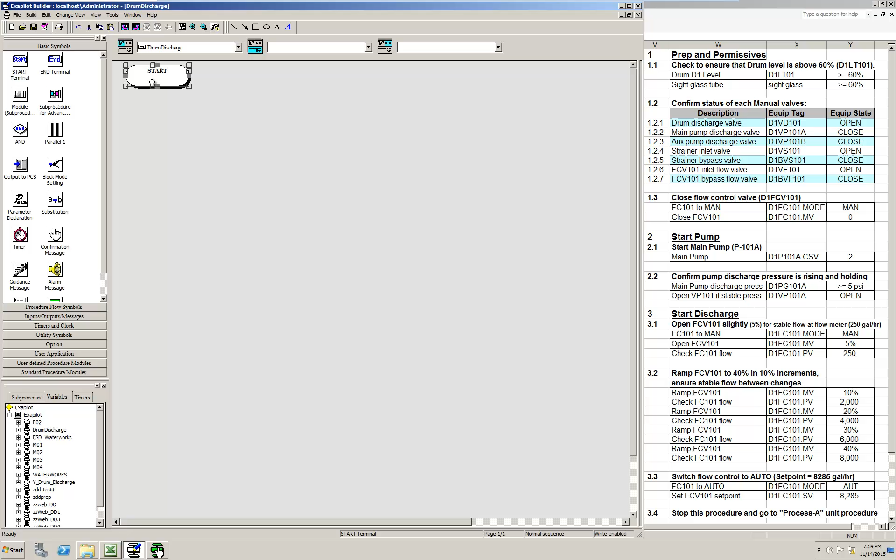First thing we'll do is go ahead and get a start terminal, because every procedure has a start and an end. So we'll go ahead and place a start and an end out on the procedure.

The next thing we'll do is go ahead and configure the OPC interface. You don't really have to do that right up front, but several of you who were in my webinar asked me how you'd be able to communicate over your control system.

So if your control system can communicate via OPC or convey information to an OPC server, then Exapilot can be used to work or act as a supervisory control over top of your controller, or even just provide guidance messages to the operator to take action.

So the first thing you'll do is go ahead and go to Build and select Main Procedure Property. As soon as you do that, the Basic tab is shown for this configuration, and at the bottom half of that pop-up window, you'll see the OPC server configuration.

It asks you for the OPC server name. When you click on the drop-down box, you'll see all the OPC servers that have been registered with that computer, that PC. And so you can see here I've got several third-party OPC servers, the TPN server, Experion PKS server, iFix, and some others. And I also have Yokogawa's OPC server called Exaopc.

So I'll select that one for this case. If your server is not listed in the list, it's okay. There's some procedure to go add and register your OPC server with your computer in the Exapilot system. And once it's registered, it'll show up in the drop-down box.

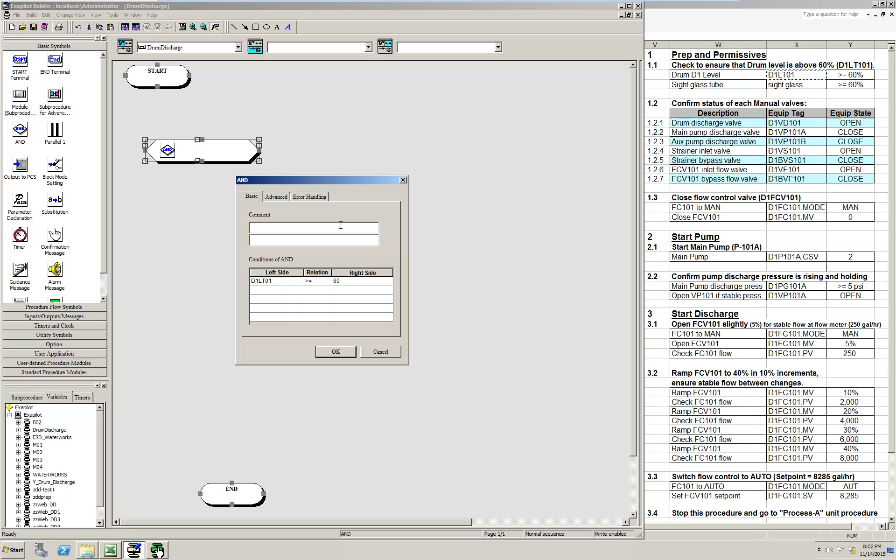So copy this, I'll paste it right into the block. And then I have this relational drop-down box, so I can choose less than, equal to, greater than, equal to, not equal to. In this case, I'm going to say greater than equal to, and then 60%. And then we'll put a comment on here and call this drum level check.

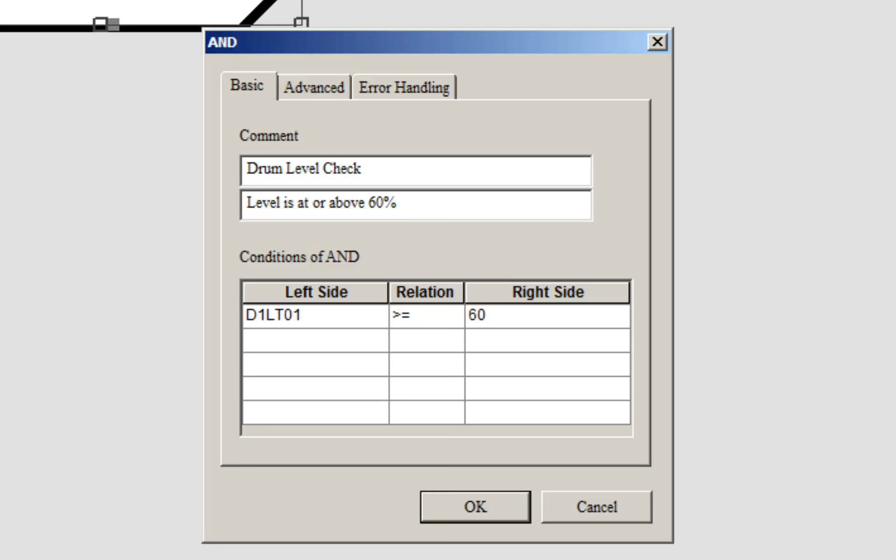Okay, and so we're done. I need to go ahead and expand this, or I can expand this if I had more text in here. You can see I can change the shape and size of this object, and that way I could add in more text here if I wanted to, saying that the level is at or above 60%. And then we can go ahead and say OK. I can resize this block to match the size for the text that's there.

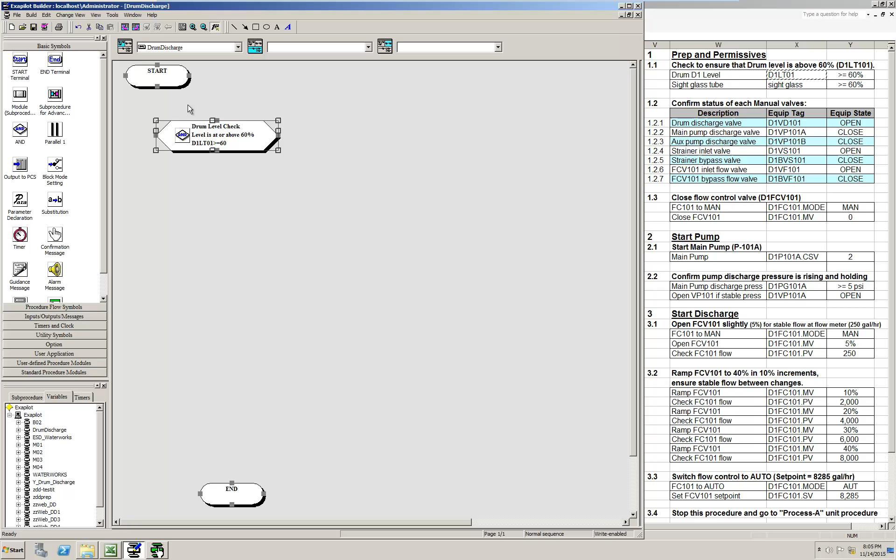And then I want to go ahead and wire that up to the start block so the logic flows properly. So I can bring this up here and say from the start, the logic flow is going to go down into this level check where it reads from the DCS.

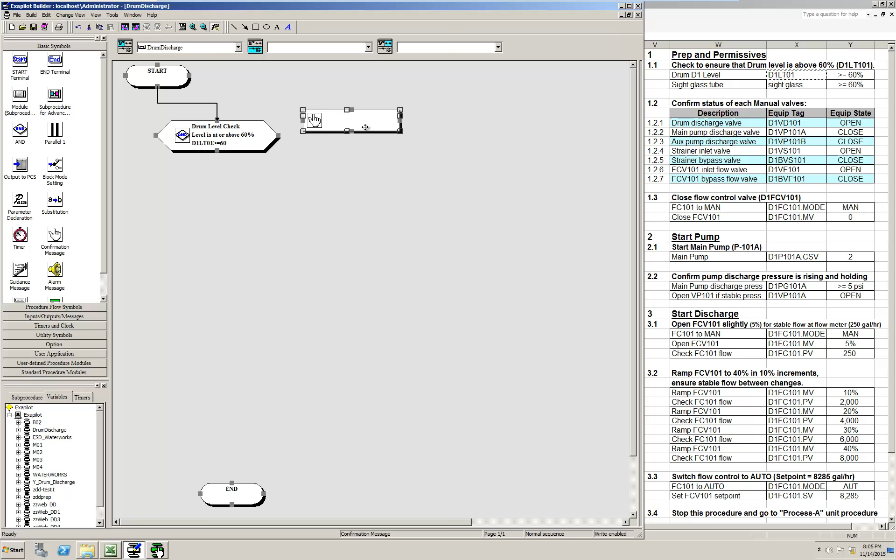The next thing we're going to do is go ahead and confirm the status of all 7 of these valves. So what I can do is build one, and I can copy and paste for the other ones. So how will I do that? We'll go ahead and use a confirmation message. So this is another object in the library that we can drag and drop into our project. And then I can just double click it to configure it.

And the comment is going to be a drum discharge valve. And then we want to go ahead and use the message. We can use the text right off of the standard operating procedure. So the action is for it to be open. So we'll copy that. We'll say, hey, we want this to be open.

And then the next convention I'm going to use is grab the tag name. So we want to say that open this tag, it's the equipment tag. Paste that in there. And then we'll go ahead and get the general description, drum discharge valve, right? So we'll copy that and put that into the Exapilot object. And we'll go ahead and change the color of the text.

I like to use blue for operator action messages. And then we'll go ahead and go under advanced. I can have an active sound or no sound. I'll leave this one active, but I'll make no sound for all the other ones. And for the display, I'll put a little display message in here that can then be used for display as part of prompting the operator.

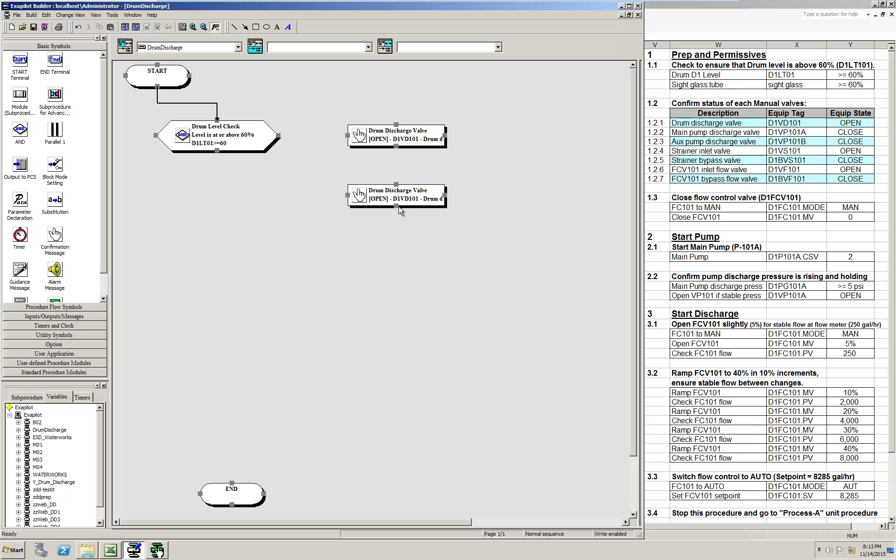And the next ones I can create just by simply copying and pasting this down. That way it'll allow me to keep the blue color. So I double click on here, you can see I still have the blue color text. And then, but I actually want to remove the sound, and I'm going to turn off this extra display text. Okay, so I'm going to use a little movie magic to realign some of these and get the rest of the valves in place.

So now that I've used the movie magic to build out the rest of these valve checks, we can go ahead and wire it up. I've already done that for the 7 valves. I've gone ahead and connected each of them with this little flow arrow, and I need to do that now for the level check. So coming out of the level check, we can simply left click on the node there and drag and drop that onto one of the nodes on the first drum discharge valve step, and then I need to characterize it just to say yes. So if it passes this criteria, then it'll go on to this step of check drum discharge valve, and it'll keep flowing on down and so on until it gets to this last check.

So once these things are all done by the operator, the next step is to go ahead and put the flow control loop in manual mode and write a 0 to the output to close that valve, ensure that flow control valve is closed. And then we'll start up the pump.

So what I'm going to do here is then grab a block mode setting object, drop that onto the project screen, and I'll drop on an output to PCS object onto the screen. This is to close the valve, and I need another output PCS to help me accomplish starting the pump. So let's go ahead and configure those.

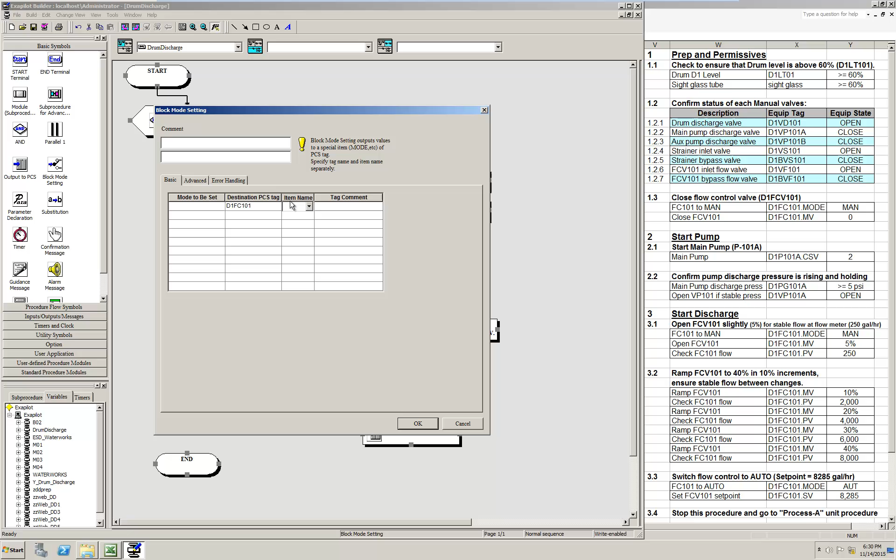So we'll take the valve, copy this tag name onto my Exapilot. So I can put this into my tag name segment, and then for the mode, for this mode block, it asks me for the parameter of the tag name separately from the tag name itself. So I need to use the drop-down box and select mode. And then for the setting, it allows me to choose the enumeration. So I can choose manual. And I'll go ahead and label this as main flow control valve. And this is the flow control valve.

Okay, and then I need to do the same thing. I need to set the flow control valve output to 0. So this is going to be the tag here, the MV, with the manipulated variable. It might be .op on your control system, depends on your control system. And the value is going to be 0.

I'll just go ahead and put, you don't have to put a range in, but I'm going to go ahead and put the range in. And this is the flow control output to the flow control valve.

And then the next thing we can do is start the pump. Once the flow control valve is closed, we can then go ahead and write to this pump. And it's getting a little different. I don't need the mode on the pump because the pump output is not a PID loop, it's a digital composite or a switch.

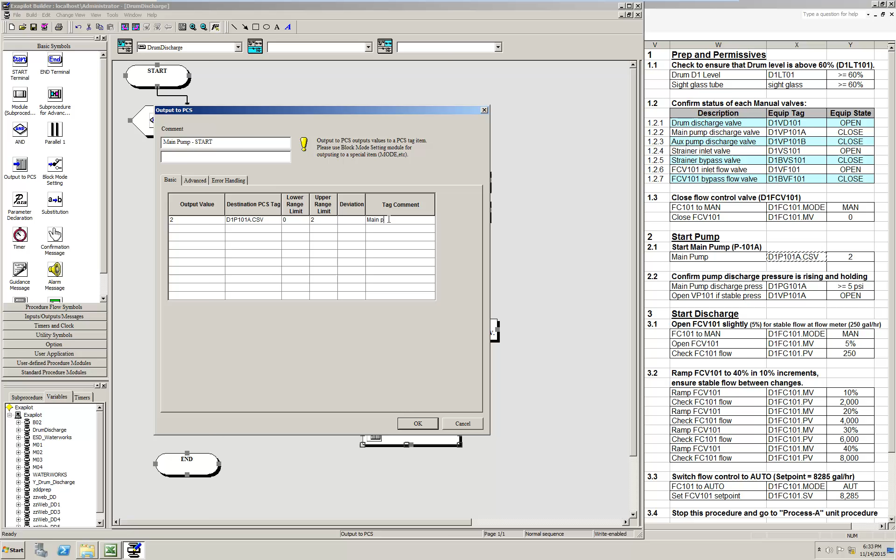And then I'm going to go ahead and skip the ramping procedure. Really, my main goal here is just to show you how easy it is to go ahead and perform reads and writes and make decisions within the procedure. That's mainly what I wanted to accomplish here.

All right, so now I've completed the line if it passes the level check, but what happens if it fails the level check? For that, we want to go ahead and create an alarm message. So for the alarm message, I'm just going to put 'failed transmitter level check.'

And to make it a little bit more fun for us on simulation, I'm going to give the ability to recover from this. So if you have a failed check here, I'm then going to go ahead and have a confirmation message to allow the operator to try to recover from this failed check. And that's because this is not connected to a real system, and I don't have an OPC server simulator running.

It's going to fail this check every time, it's going to read a 0. So I want to be able to recover from that so I can show you how this procedure works. And so I'm going to go ahead and say perform sight gauge check, so we can have the operator go out and look at the sight gauge and manually check the level and enter a value.

All right, and since this is an operator action, I'm going to go ahead and make this blue. And I'm going to show you a feature of the confirmation message that I talked about earlier but didn't demonstrate. So you have 3 choices on a confirmation message: confirmation only, selection, and setting. Under selection, this is what you'd use to then configure a set of selection buttons for the operator to select. In this case, I'm not going to do that.

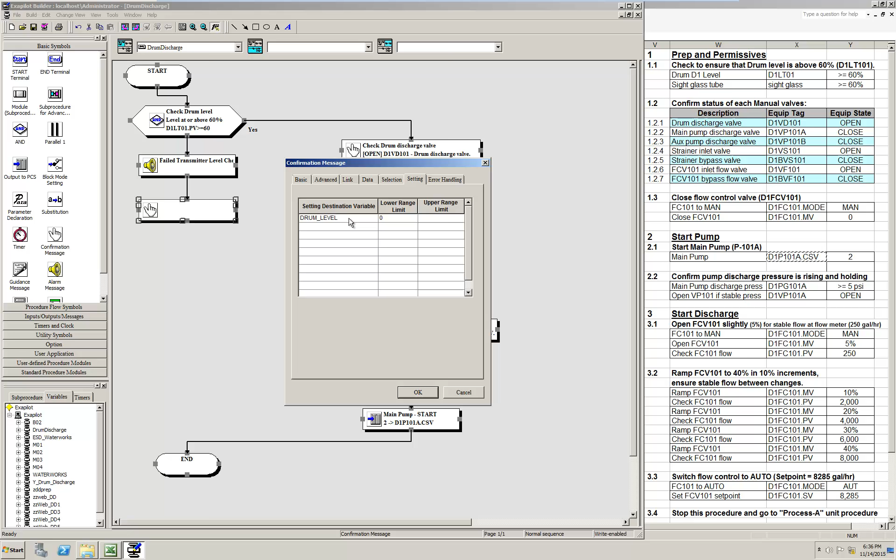Say OK. And then I can drag and drop on a parameter declaration down here. I can actually place it anywhere on the page. I'm going to put it down here below the end block. If I double click on that, then I get a pop-up here, and I can now enter in the variable that I want to write to.

So this variable here is going to take the input that the operator is going to enter and store it, because then I'm going to use that variable as another check, just like we did on the drum level check from the transmitter. We're going to do another check off the operator input to see if it passes the same criteria. Just because the operator entered it doesn't mean it's an automatic pass, right?

It's got to pass this criteria here. And instead of looking at the DCS tag.parameter that's coming from the OPC server, I'm now going to use the variable that the operator entered to do that check.

And then if it passes this, then I want to then go back into the valve lineup. So I can wire this to the same node that the transmitter drum level check is going to. You can have multiple lines wired to the same node. If it fails, let's go ahead and do an alarm on that. Then we're going to say 'failed sight glass check, fill drum and restart.'

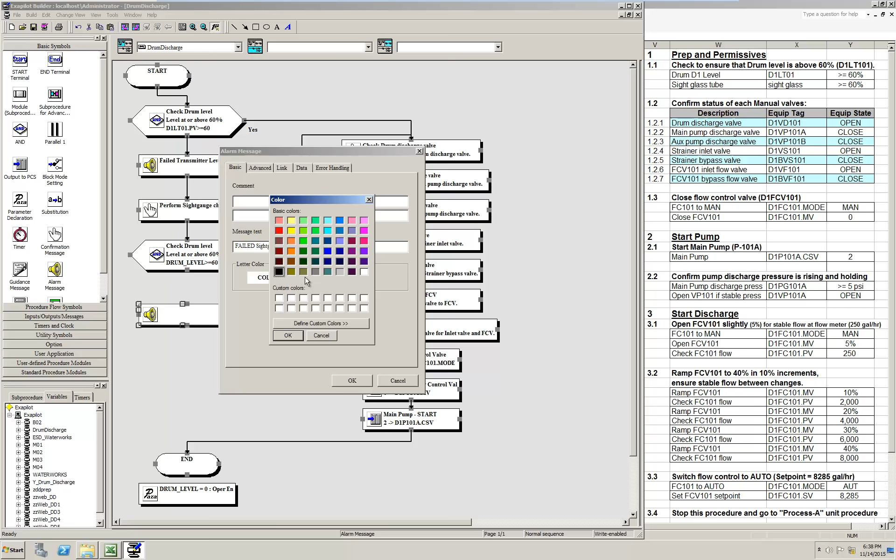We'll go ahead and make this red. Now I'm going to wire the no decision here. I need to characterize this flow as no, and the line I put into the valve lineup as yes. So now I have two flow paths depending on the decision from the AND block. If I fail a second time, I'm not going to allow the operator to re-enter a new value.

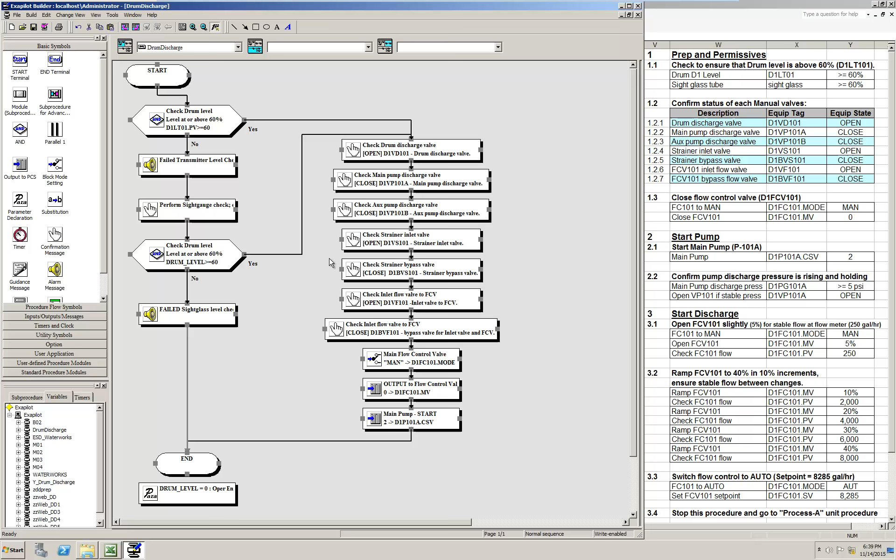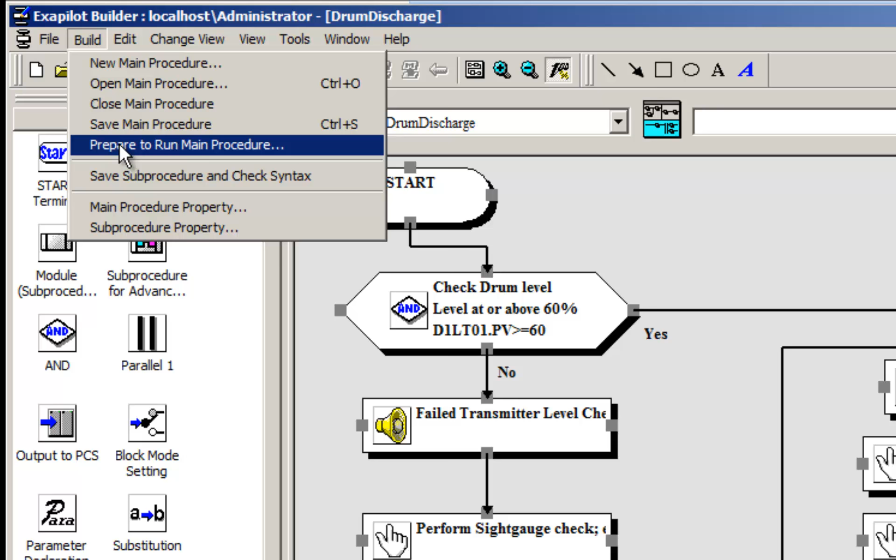I'm just going to tell them to refill the drum and restart this whole procedure, and we'll end. Now all that's left is to compile this procedure, and then we can test it out. We can run it, and we select build, prepare to run main procedure. Then we get a pop-up box that lets us select some settings, and we say okay.

If everything goes well, we'll get a correct syntax at the end, which I did here. I want to point out we do have a warning, and it says PCS tag existence check will be skipped because OPC server is not connected or failed to authenticate the OPC server. That's a normal message you'll get when you're in offline mode or standalone mode. I'm not connected to an OPC server or simulator, and I'm not connected to a real system.

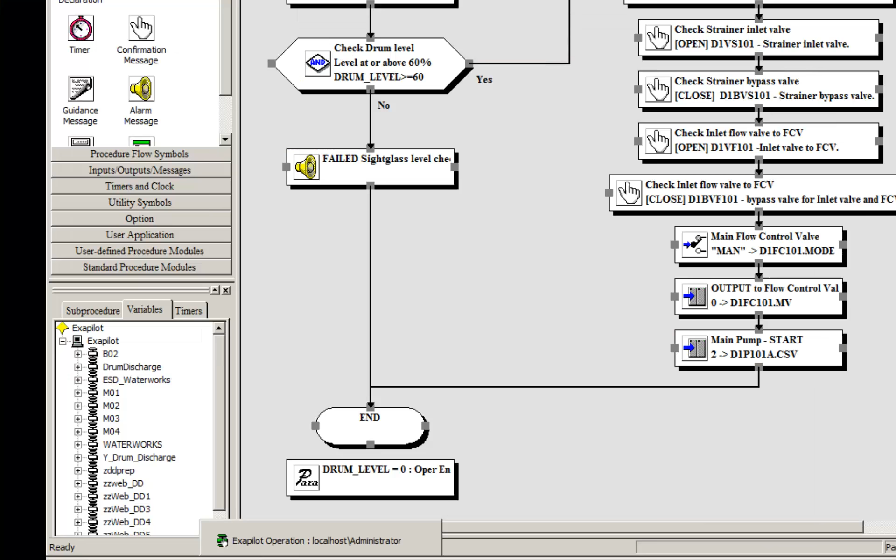But we can still test the procedure if it compiles with correct syntax. So we'll select this tool, which is the operator user interface. The operator can either use this interface on a separate screen next to his process graphic, or he can choose to integrate the components of this tool into an existing operator graphic.

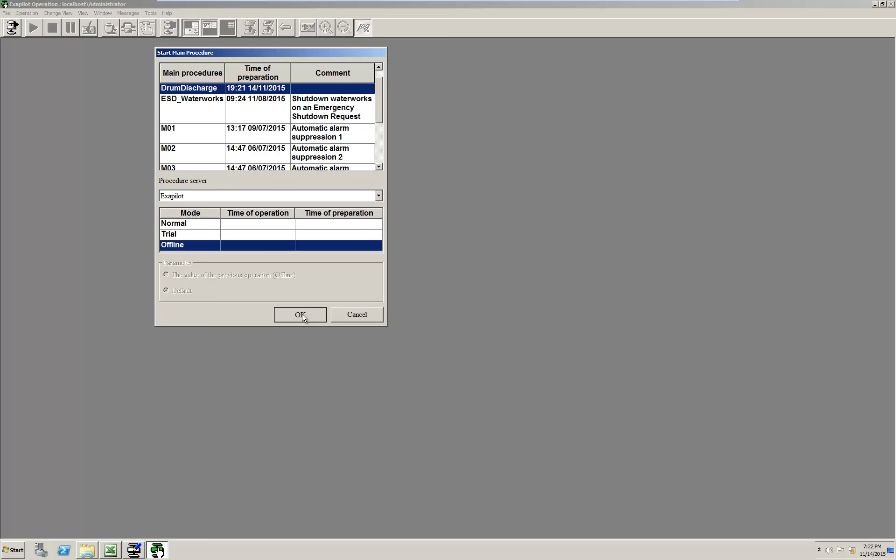To get this to run, we're going to select drum discharge, and we'll go offline since we're in offline mode and not connected to a real system. Then we're going to go ahead and test the procedure. The first thing that happens is we get a starting drum discharge message. It gives a little audible alert to let the operator know the procedure started up. The next thing we hear is an alarm.

So what happened here was an alarm went off. I selected the little alarm icon to bring up the alarm message list, and we see it had a failed transmitter level check. I selected OK, which silenced the alarm and let the operator know they could view that. And you still see we have a remaining operator message waiting for us, which is to perform a sight gauge check because the transmitter check failed.

Everywhere you see gray, that's the procedure steps that have already been executed. The green procedure step is where the procedure is currently on. Where it's white, none of these have been executed yet. So you can see it automatically read in the level, and it didn't meet the 60% criteria. Then we got the failed transmitter level check alarm. We silenced that, and now we're on this perform sight glass check step.

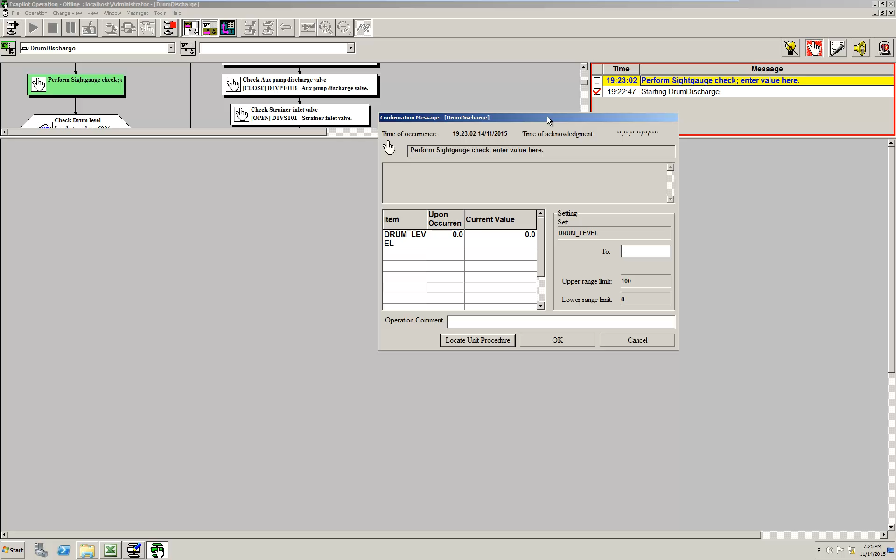When you select one of the steps you're prompted for, you still get the pop-up right on the same screen as the operator HMI, the normal DCS HMI, so the operator can still interact with that. In this case, we'll do the sight glass check. We'll say yes, 65%, and it'll help us go on.

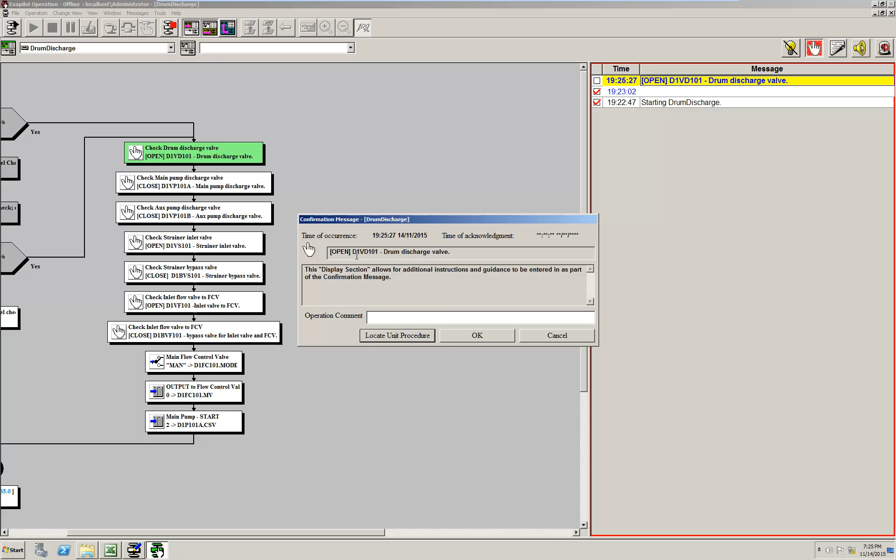I'm going to go ahead and expand this back for this view, since we're not integrated with a DCS—it's just nicer to see us go along. So now we see that we did pass the test, and we're being prompted to open the discharge valve. You can still hear a tone sound, and I'm going to go ahead and silence it here with the silence button.

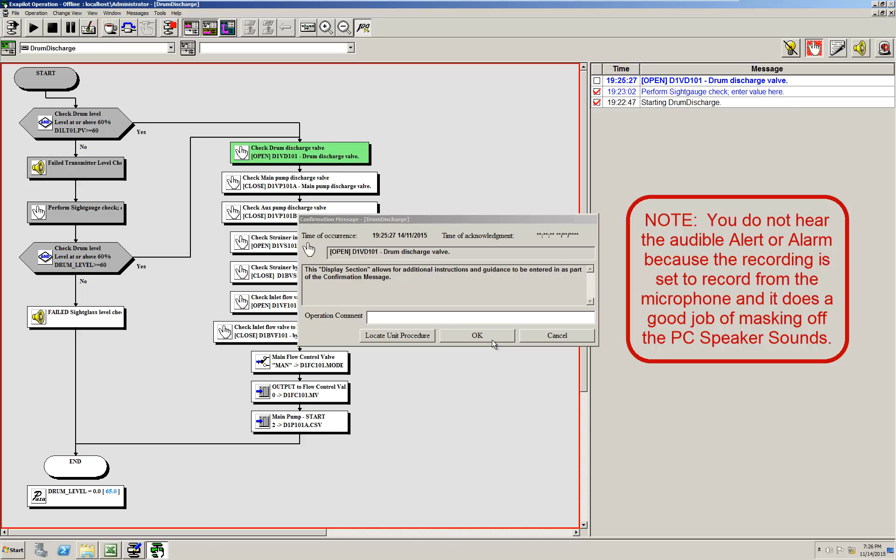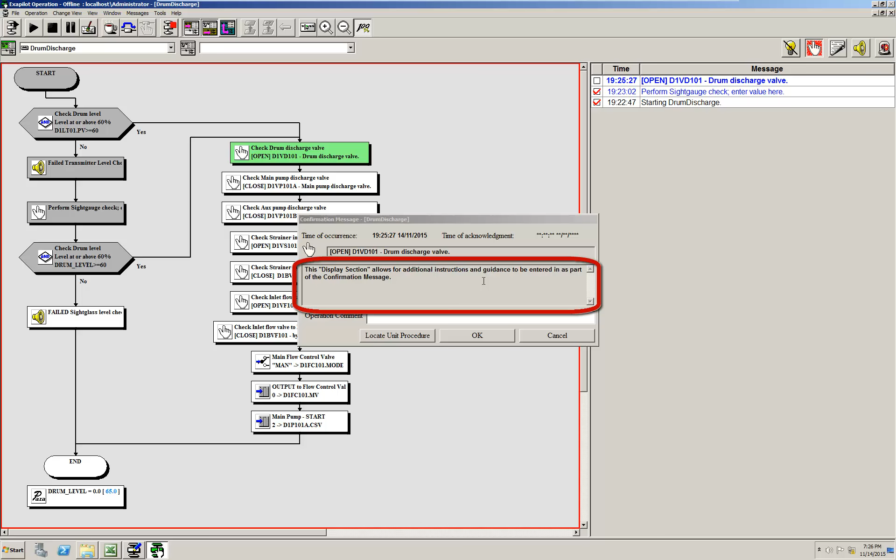That tone sound is because, you may recall, when I was developing the application for this very first valve lineup check, we left the tone on. That gives you an audible as well as a visual pop-up letting the operator know he needs to perform an action. I'll also point out this extra verbiage I typed in. It says this display section allows for additional instructions, because I selected the checkbox for additional text space. These remaining sections don't give an audible if I select them, and they don't give the extra set of instructions—just the brief prompt we typed in: close the main discharge valve.

So if I say OK on this step, I'll go to the next operator guidance message, which says close the auxiliary pump discharge valve. When I select it, it's asking me to check that valve, put it in the appropriate position, and it requires an operator response—so I have to say OK or cancel before the procedure will go on.

Also, I'd like to point out it has a time of acknowledgement area here. It has the timestamp for when the operator guidance message came in, but it doesn't yet have a timestamp of the acknowledgement. The acknowledgement occurs when you select OK. Once the operator selects OK, that timestamp is placed into a log, and you can use it to prove you did all the steps in order, or to show that a step was missed by accident. It helps you perform further analysis if an event occurs.

So we say OK, and then the next prompt occurs, and the operator would select that, read the message, and follow the instruction. Once complete, select OK, and it goes to the next step, asking for the strainer bypass valve to be closed. Once that's done, we select OK, and the procedure asks for the inlet valve to the flow control valve to be opened. Once we've done that, we're prompted to close the bypass valve for the inlet valve and the flow control valve.

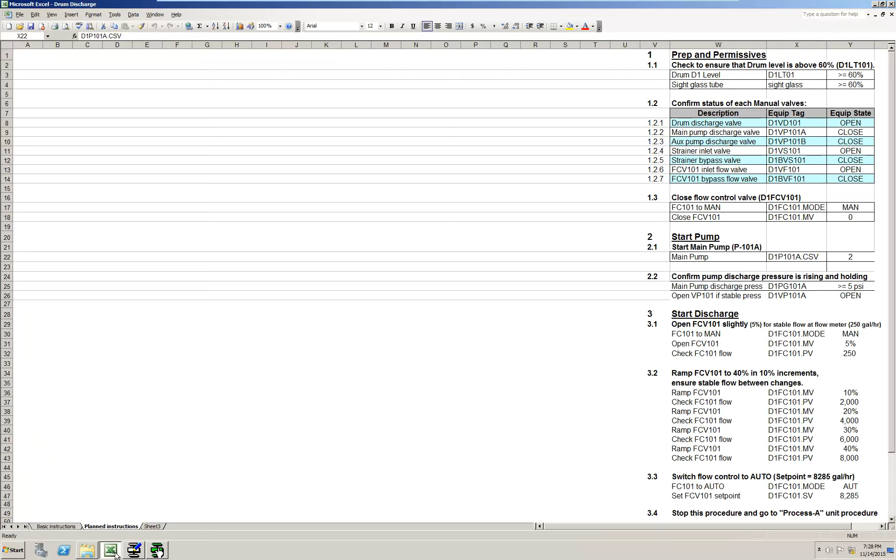So if you're not sure what that is, this is the bypass valve to the inlet flow valve and the flow control valve—that's what it's talking about. So we can say OK to that, and then it's going to put the loop in manual mode, send an output of zero, and start the main pump.

Now I hear a little tone because it's stopping the drum discharge procedure. As soon as I say OK to that, the procedure goes ahead and closes, and now it's in the default state. For the operator to start procedures, he could simply click on this run icon, select the procedure he wants to run, and run a new procedure.

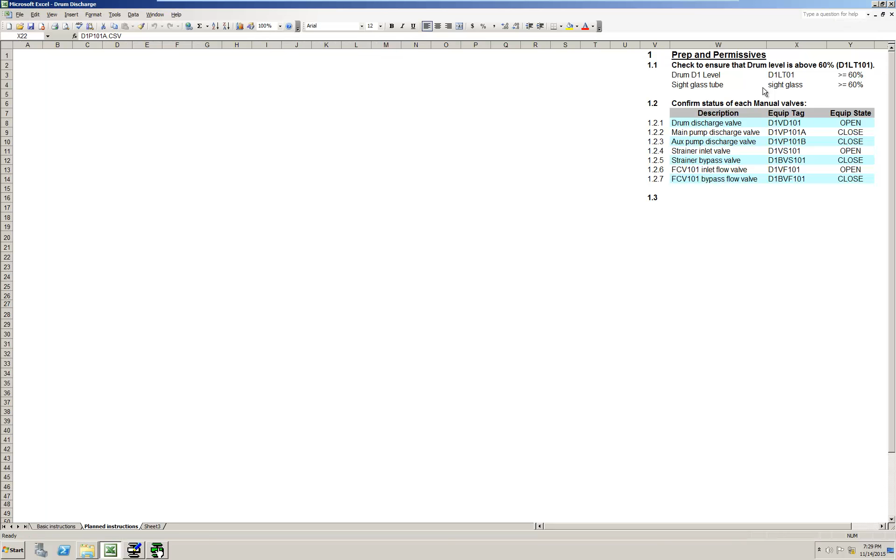If this were integrated into the HMI of the operator control graphics, our libraries have button objects that can be associated with specific procedures, so the operator could also start procedures from within the operator graphic if so chosen. I didn't show it here, but you could also set up procedures that continuously run. This one has a start and an end, but we could have it loop back to a start, with an AND block looking for a Boolean value or state to be met. If something turns on, it would run the rest of the procedure; otherwise, it would just hold on that AND block.

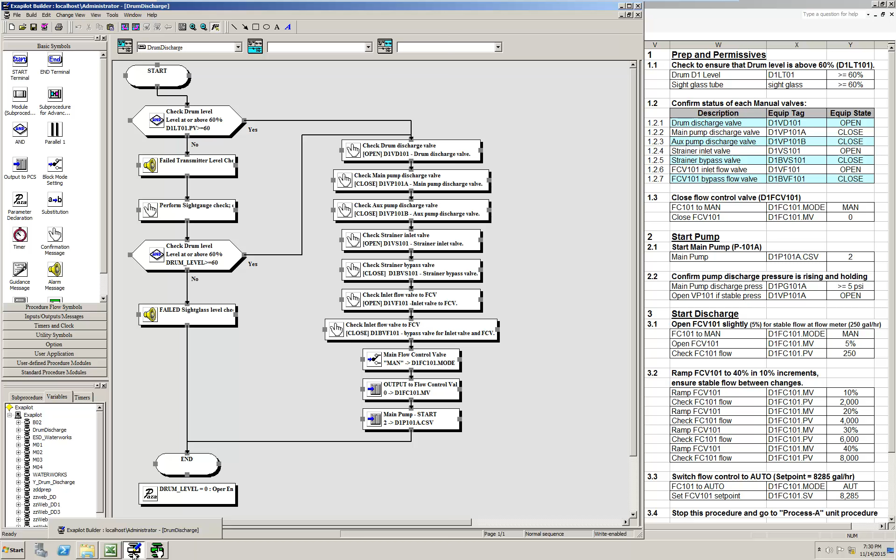If you'd like to see this full procedure built out, or a different kind of procedure from the one shown in this example, just contact your local salesperson or shoot us an email. I or one of my colleagues would be happy to go to your site or have you come visit us. We can go through the entire procedure, build it out completely, and show you some other neat tricks associated with the product—like how each step allows an operator to kick off a link to a document or video for more detail on what he needs to do. But I was just trying to keep it simple today, to give you a flavor of how easily an operator can get started using our tool.